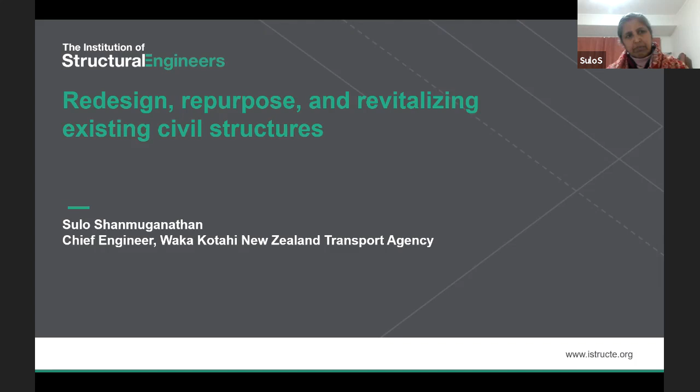So the title of my presentation today is Redesigning, Repurposing, and Revitalizing Civil Structures. We heard from Mark and Chris of how they made use of existing building structures to repurpose for current and future uses. This presentation is mainly focusing on how to make use of historic civil structures.

Before I get into the presentation, I thought I'll give a bit of an introduction of myself and what I have been doing in the last 30 odd years.

And then we look at the reasons for why we need to repurpose, revitalize, or redesign the existing civil structures and some of the significant problems through real life examples. And we will focus on key challenges and lessons learned.

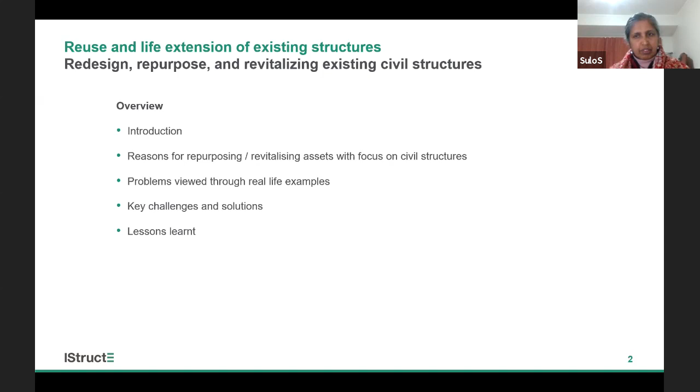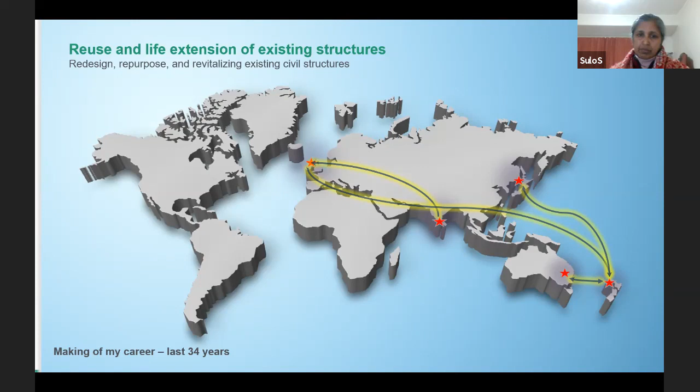I just thought I'll share with you the journey I have taken in the past 3 decades. So I originally started my education in Sri Lanka and then moved to the UK to do my postgraduate education and spent about 8 years doing studies and work before moving to New Zealand. So the last 25 years were mainly spent in New Zealand, a few years in Australia and Japan. Although I worked in building structures, most of my experience in consulting engineering is mainly on civil structures.

And in New Zealand, I focused on land transport infrastructure projects, both new builds and repurposing existing structures. One thing we specialize in very much here is how to look after existing structures as well. As you know, we are sitting on the ring of fire, so from time to time we experience major earthquakes, and so seismic engineering is a critical part. I'm not going to share much on seismic retrofit, but I thought it's good to mention.

And as we heard from other speakers, most of my current work is on looking at how to get more from less and how to make use of existing structures without building new ones. So we're looking for value for money.

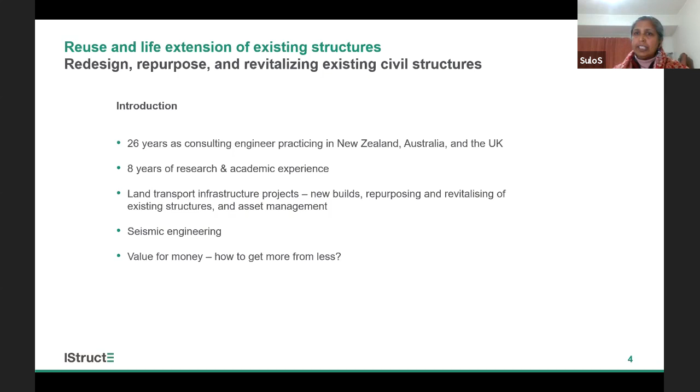So it's interesting to look at why we need to repurpose these structures, because there itself lies the important message that we don't need to build new stuff all the time. And currently we know the climate change and environmental situation and decarbonization, everything points to us that the more we reuse, the better life for us and the future generations.

Some of the reasons in the past being that when we designed these structures 100, 200 years ago, they weren't designed for durability in mind, so often we need to intervene to look after the structures. And significant increase in demands, live load demands and code changes and various other demands make them need to be upgraded. So that's another reason for revitalizing.

And as you would see in one of the examples, they become slightly redundant or not much further use can be gained, so then we need to look at whether we should retain or dispose of them. And often when they reach the end of their life, it's also important to look at what to do. Now it's even more important to look at how to demolish or reuse the structures when they reach the end of their life.

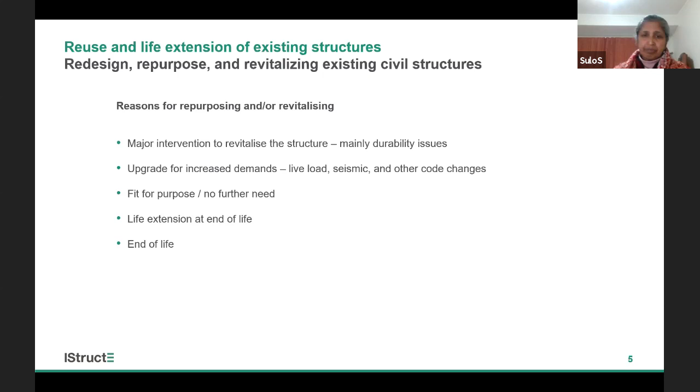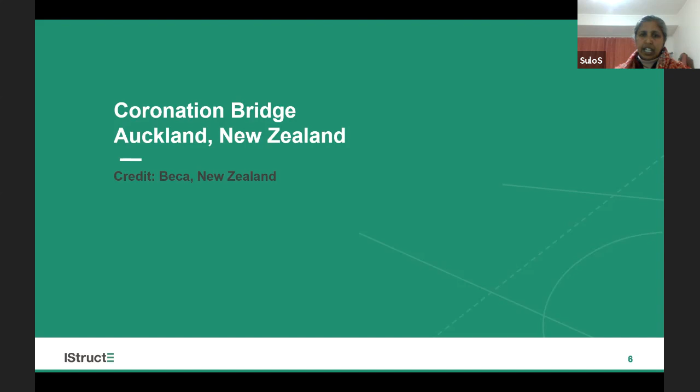So the first one is Coronation Bridge in Auckland, New Zealand. This was done in the early 2000s, when I was working at Beca. As you would see, it's a concrete arch bridge. The reason for its name: the first crossing was built in 1911 when King George V was crowned. That's how the name came about, and it was a timber crossing.

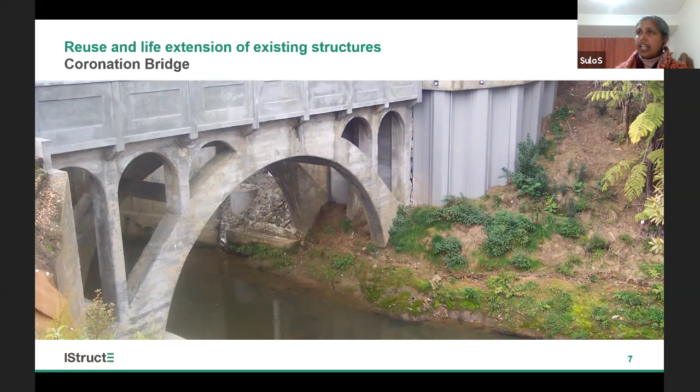Sometime in 1940s, I think it's 1947, that bridge became redundant because it had to be replaced by the current bridge when they built the Great North Road along the west of Auckland. The current bridge was built in 1947, and when they did the realignment of the existing road, the bridge became redundant again. So it was used as an access for the adjacent car park from the 70s to early 2000s.

In 2005, the bridge became significantly deteriorated because of floods undermining the foundation of the arches, erosion, and corrosion in the rebars, and slope instability of the abutments. So it was a significant safety concern, and the council had to close the bridge.

Which was very inconvenient for pedestrians using the car park from the road. When they looked at a replacement bridge to maintain the existing access, it became something like 2.5 million, which wasn't a good business case.

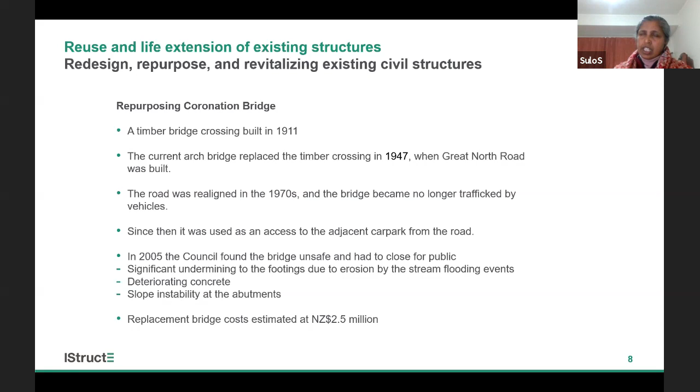So in 2007, it was decided that they could repair the bridge and make it part of the heritage trail for pedestrians and cyclists. And that's when we got involved. Compared to the full replacement cost, it only cost 420,000 to repair and retain the structure.

Just to give an idea, £1 is something like 2 New Zealand dollars. So that's the cost to repair this bridge, to keep it and use it as part of the heritage trail for pedestrians and cyclists.

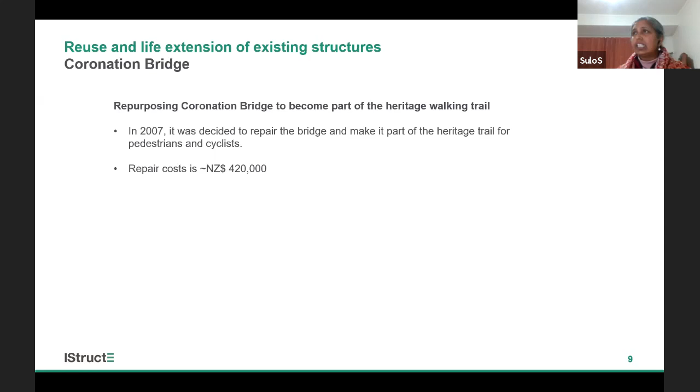significantly eroded the foundation at the left-hand side, so we had to do some sheet piling and rock anchors to stabilize the foundation. There was quite a lot of erosion behind the backfill at both abutments, so they had to be sheet piled and filled with flowable mass concrete to stabilize the ends of the arches.

Quite a lot of vegetation and slope stability work took place, including new drainage to make sure it had proper drainage behind the retaining walls, in addition to repairs to the concrete spalling and cracking, and new surfacing to maintain access on both sides.

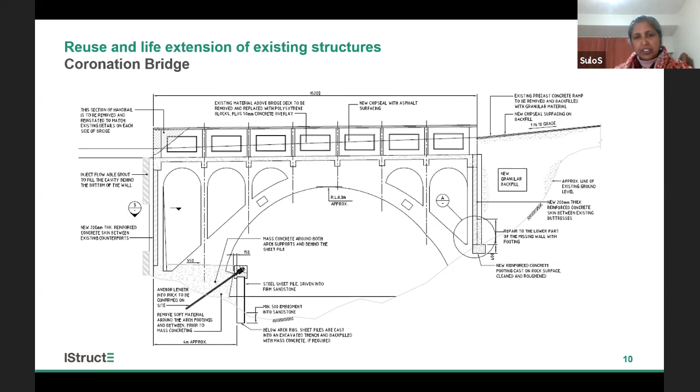Unfortunately, I don't have photos taken before the repairs were done, but I can show you the photos after. It's very difficult to picture how it was before, because it was in such a bad condition. Without that, it's difficult to imagine, but still, this is what we have.

So this is the left-hand side of the bridge, where the car park is, and it provides access to get to the road at the intersection. The bridge spans about 15 meters.

In the right-hand side photo, you would see a short land span to get to the road. Before the repairs were done, it had a double T because of erosion of the soil at this side of the abutment. They had put in some temporary double T beams to span that.

erosion of soil. So the major work is stabilizing the slopes, underpinning the foundations, doing repairs, putting a new handrail to comply with cyclist handrail heights, and strengthening the parapets as well.

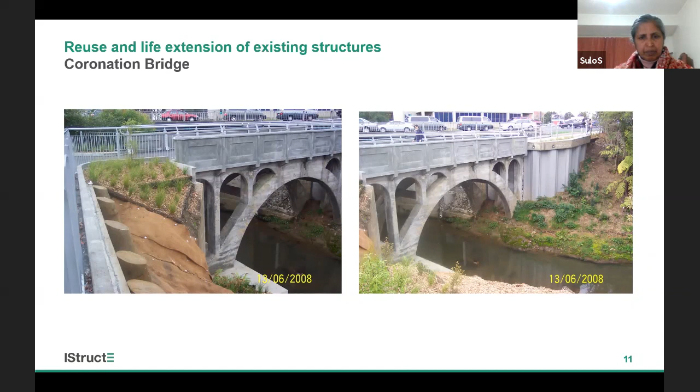So this is the car park viewed from the road, and this used to be the double T, and this is only 3 meters wide, which complies with the codes for cyclist width. The original bridge is something about 5 meters wide.

So that's the finished bridge. It provided access to the heritage trail going around the stream the bridge crosses. It's a stream that runs across western Auckland.

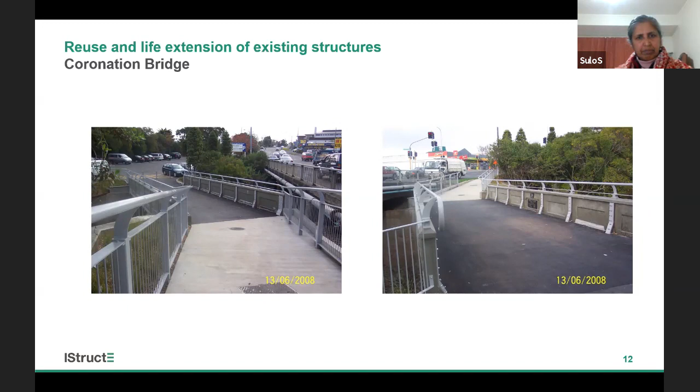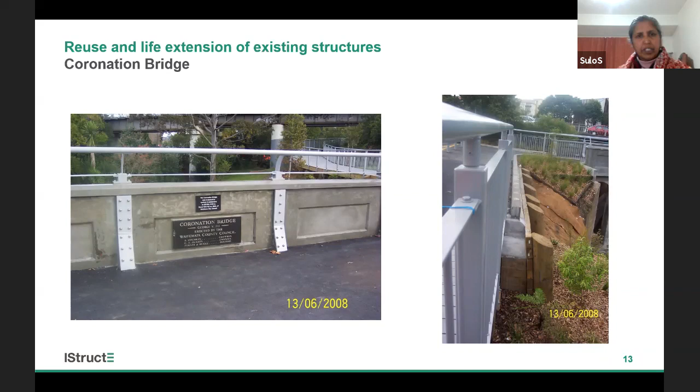And that's the plaque from the original bridge, which was kept in the second replacement bridge as well. You could see that's the name. And this is a new plate put on when they opened the bridge in 2007, 2008.

So that showed an interesting example of repurposing a bridge when it became a redundant structure because of realignment, and the purpose of the use has changed.

Now we're going to look at another example of a road bridge over a very busy motorway slightly north of Auckland CBD, which is called Esmond Road Underpass.

This is the aerial view of Esmond Road Interchange. That's the northern motorway, north and south. This side is the CBD, and this is the Esmond estuary, and this is the connection to a suburb called Takapuna.

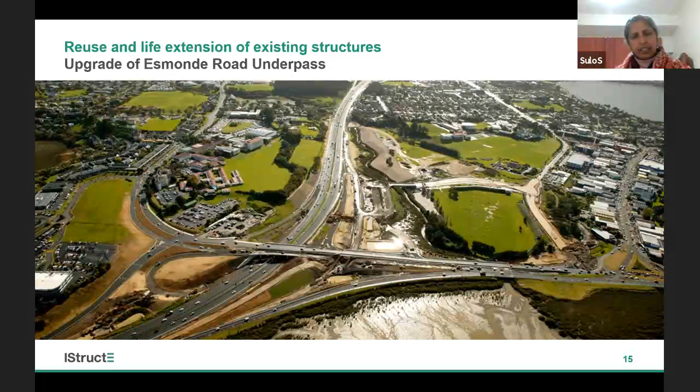The purpose of this project is to improve the public transport of the northern side of Auckland with the CBD, building a bus station in this location and giving better access to buses coming through the motorway and exiting, then going back onto the motorway, and to better connect east and west, and improve access for vehicles as well. That's the main purpose of this upgrade, and it's part of a wider busway project for north of Auckland.

This bridge was built when the original motorway was built in the 1960s, so the code has changed since it was built. Because of the realignment of the roads, we had to build a new bridge adjacent to the existing bridge, and the existing bridge had to be modified significantly to suit the new alignment.

The upgrade works at this interchange included modification and strengthening of the existing bridge and a new motorway bridge. We can see the piers for the new bridge across the motorway, and this is the existing bridge undergoing modifications and strengthening. There is also a new loop for the on-ramp to get onto the motorway.

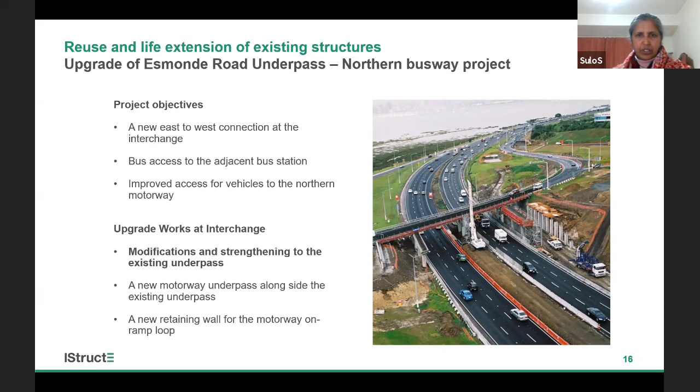As part of the upgrade, the existing Esmonde Bridge needed to be raised about half a meter. Not a constant raise, but a vertical curve, an improved vertical curve, making the bridge go from 0 to 0.5 meter increase. Also on the western abutment, it had to be widened about 1.5 meters to suit the horizontal alignment, so it involved both vertical and horizontal changes to the bridge.

As I said, the bridge was built in the 1950s/60s when the original motorway was built, and at the time the design loads were H20-S16-44, an AASHTO design. The current loads are something like 20-25% more than the original design load. So there lies the significant strengthening or upgrade required.

As you have seen, it's a 3-cell reinforced concrete bridge. The depth of the girders is about 1.1 meters, and each pier is supported on two columns on pile caps, and a group of 6, 450 millimeter diameter cast-in-situ concrete piles.

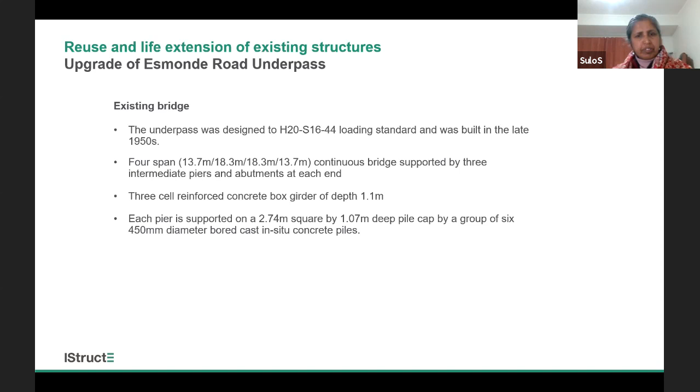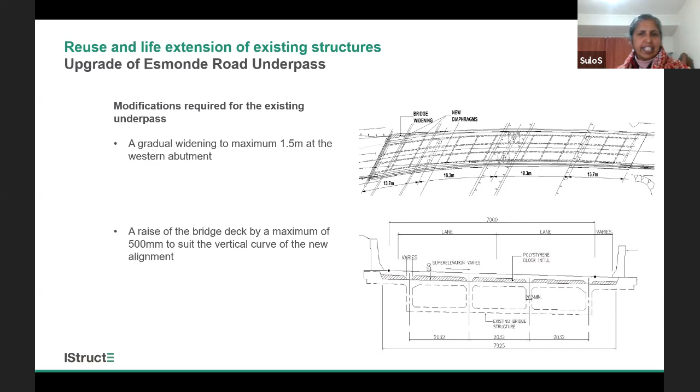So I'll go back and show you. This dotted line shows the original deck, and this had to be raised up to 500 millimeters. To reduce the dead load on the existing bridge, we came up with a solution of using polystyrene lightweight blocks and then casting the new deck on top of that, with some rebars epoxied into the existing web girders and the existing deck. I'll show you a better view of that shortly.

The structural assessment or analysis we did showed that the external web girders, especially close to the piers, were only sufficient to carry about 70% of the shear demand due to current traffic loads, so they needed to be strengthened to meet current demands.

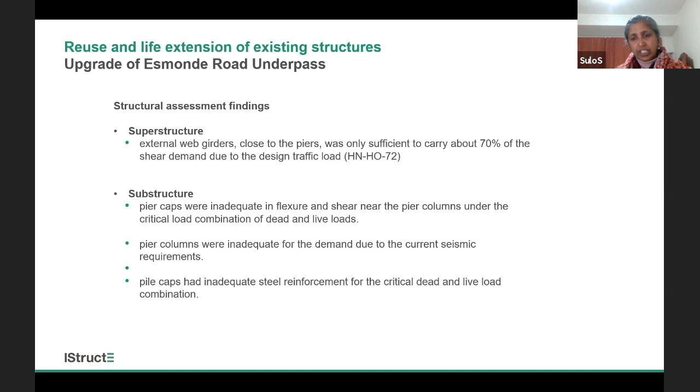The substructure assessment pointed to us that the pier caps were inadequate for both flexure and shear demands, the columns were inadequate for current seismic requirements, and the pile caps also required additional flexural steel for the dead and live load combination. So significant intervention was required here to upgrade this bridge, both for the modification of the alignment and to meet current demands.

All this work had to happen during a live traffic situation. So we had to build the new bridge first so that we could divert the traffic coming onto the motorway and coming out of the motorway, before we could close this bridge to do all these modifications. The interruption is quite significant, and temporary traffic management is really, really critical so that we don't bring traffic to a standstill and make a major headache for city travelers.

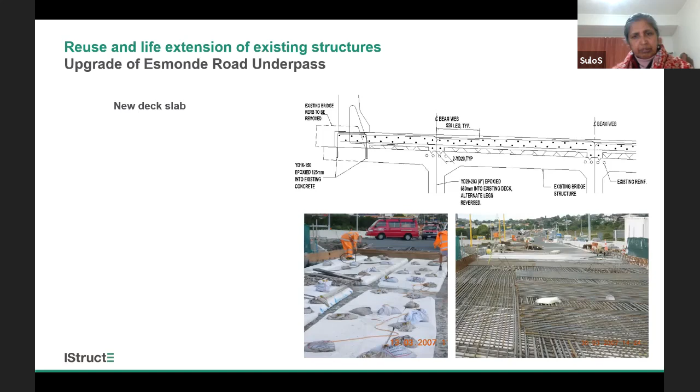We thought about strengthening the webs to improve its shear strength in different ways. At that time, it was well established that carbon fiber composite polymers were the better option because of their lightweight nature, ease of installation, and less disruption.

This was the first bridge to be trialed on a major structure in New Zealand at the time. As you can see, they had to cut holes because the depth of the girders wasn't enough to come through a manhole from the bottom, so they had to cut from the top. Every time you interfere with a bridge like that, significant work needs to happen. Analysis had to happen to make sure the dead loads can be taken without significant distress to the existing structure.

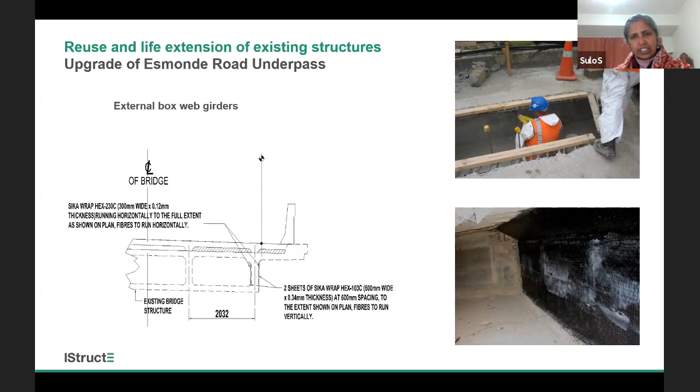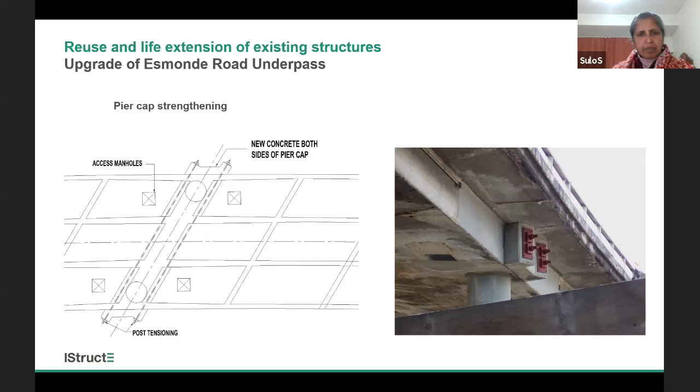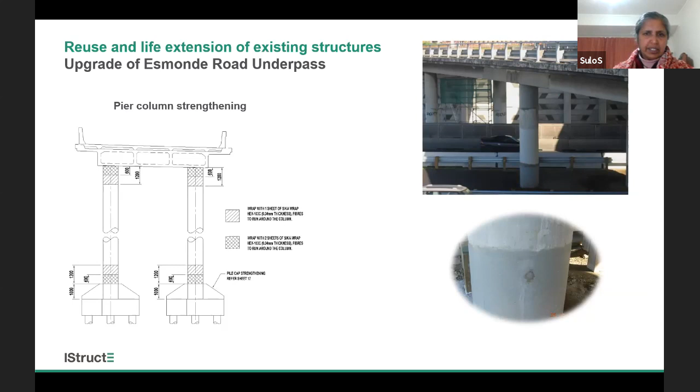To increase the capacity of the pile caps, we came up with an overlay and epoxying the reinforcement like this, and it's a very time-consuming construction method. The reason for choosing this was there wasn't enough space in the median—these columns are in the median—to bring in big machinery or equipment for post-tensioning. But this was chosen; on hindsight, maybe post-tensioning could have been a much easier and elegant solution.

But you couldn't have closed any of the traffic lanes, especially on weekdays. Even on weekends, we couldn't close any of the traffic lanes. So it's a significant constraint in terms of how you could do the strengthening for existing structures when they're on busy roads, especially on a motorway, which is a critical transport corridor.

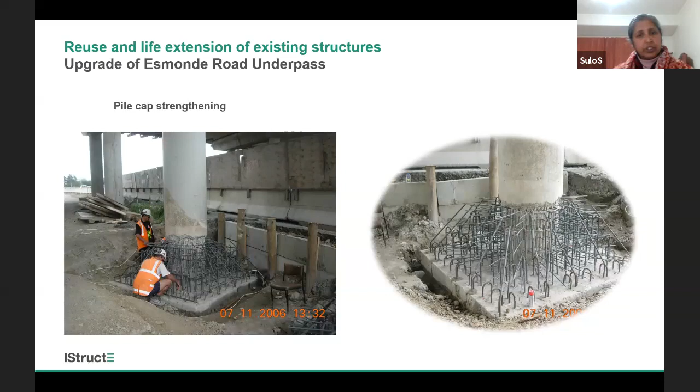I mentioned a few construction challenges, but I listed these because I know the time here is well past midnight, and my mind would be a bit out of it. So I think one of the key challenges for us was restricted access, and not being able to take heavy machinery to the medians or even near the roadside because of lack of space.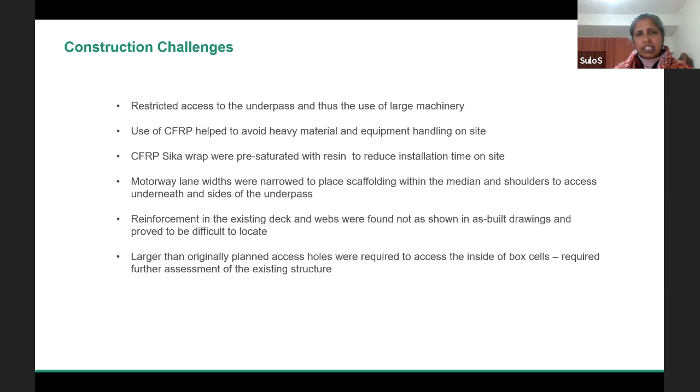To position them and do the strengthening and modifications, the focus was to provide the strengthening works, or anything we modify, to fit within the space, and also without making the traffic stop or anything like that. We can't take any chances—we need to have contingency plans if that didn't work. So this is one of the main issues in coming up with solutions.

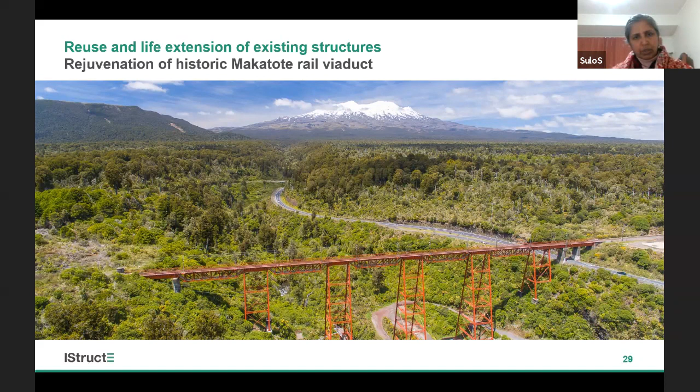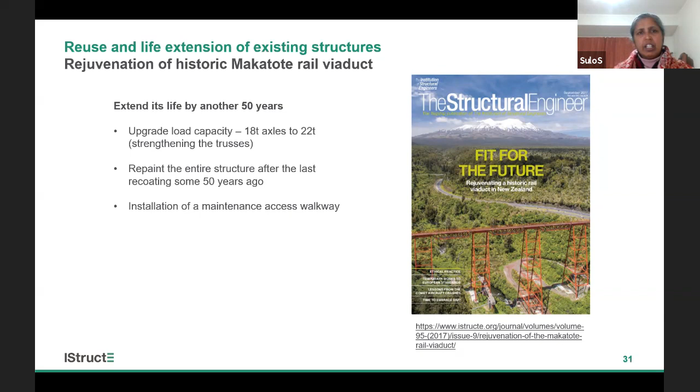I'll show you the third case, which is existing—I'll take one minute to show this. I don't think I need too much time here. This was published in the Structural Engineer magazine in 2017, so anyone interested could take a look. This also had similar issues in terms of operational requirements, not being able to disrupt the rail operations, and coming up with a solution that can fit within the constraints.

My final words are that any work we do on existing structures is tricky, and in my experience, the main issue always seems to be the interruption and how it could be managed carefully. Quite a lot of consultation goes into this to make sure everyone's fully informed and stakeholders are taken care of. Often, especially with Makatote Viaduct, which we didn't go through in detail, there were significant access restrictions.

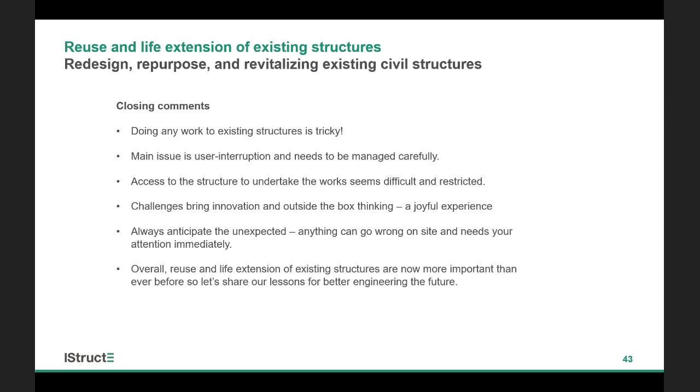The challenges often give us the opportunity to innovate, and outside-the-box thinking is critical—it's often a joyful experience. It's important to always anticipate the unexpected, because anything can go wrong and it needs our immediate attention. I think reuse and life extension of existing structures are now more important than ever before, so it's important that we share our lessons for better engineering in the future. Thank you.